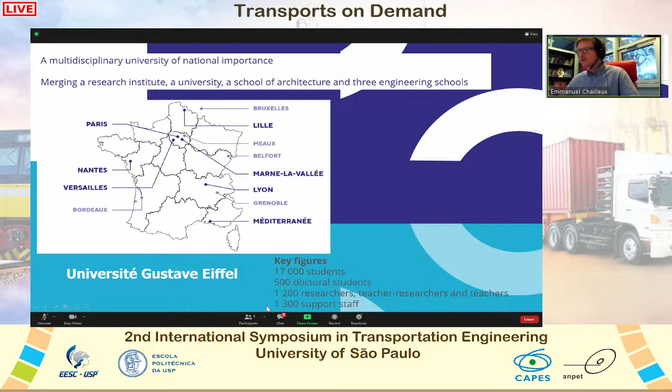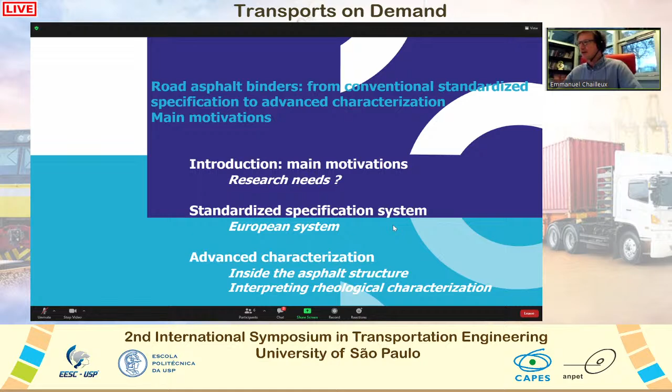The plan of my presentation is as follows. There are two items: the standardized specification system, the European system, and also some advanced characterization using linear viscoelastic theory and experimental characterization. But first, I would like to make an introduction explaining the motivation for this presentation, and what the research needs are according to specification.

So why do we use asphalt in road construction technique? In fact, it's a very interesting material. This material is between a liquid and a solid. It can be represented by a spring associated with dashpots — what we call a viscoelastic material. It can be liquid at high temperature and very brittle at low temperature, and in between these two extremes. This is why this material is very good for roads compared, for example, to cement concrete, because it has the ability to relax stress — stress coming from thermal expansion of the material, but also stress coming from traffic, from the lorry.

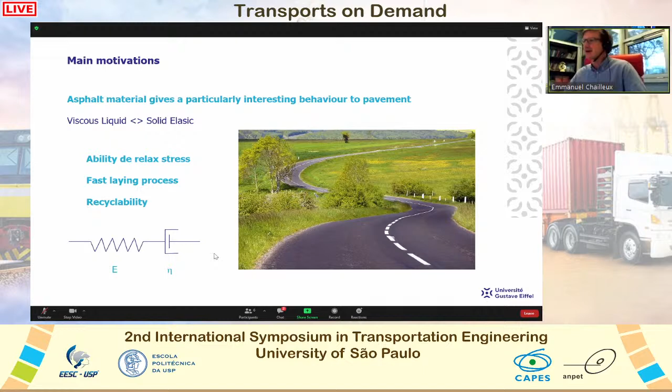There is also another advantage: the fast laying process. Traffic can circulate very fast after the laying process, perhaps within 1 hour, which is not the case for other types of material. The other advantage is recyclability. In fact, this material can be considered a thermoplastic, meaning you just have to heat it to reduce the viscosity and recycle the material.

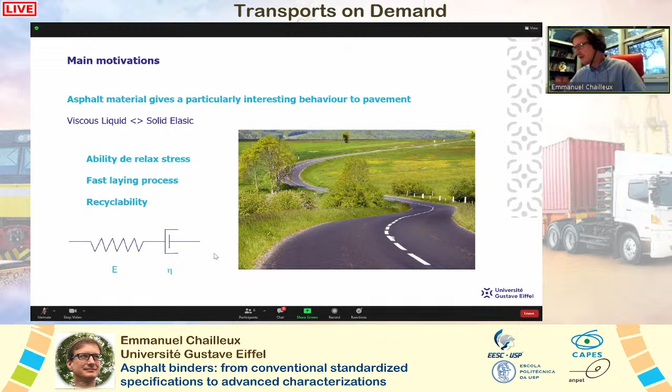So some definition of asphalt. Asphalt could be natural, as you can see on the picture, where we can find bitumen direct from a lake here in Trinidad, or from a mine. But more generally, road asphalt came from petroleum oil distillation, the residue from petroleum oil distillation.

The main characteristics of this special material are as follows. It is highly viscous or solid at room temperature and liquid at very high temperature. It's an almost non-volatile material, even if there are some debates at the moment about this fact. It's a sticky material, and what is very important, it's a hydrophobic material. It is perhaps the main property, the main interesting property, the hydrophobicity of this material.

And another definition is that asphalt has to be soluble in toluene. So next slide.

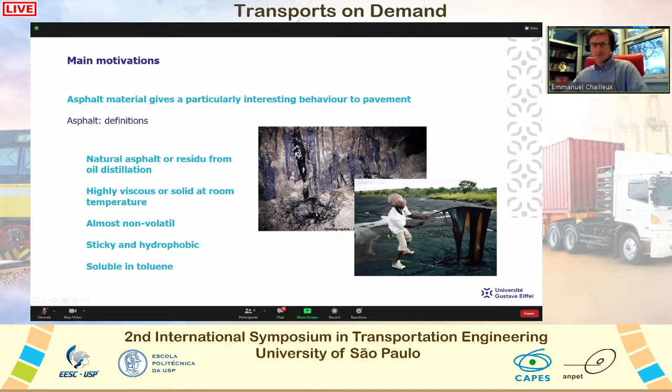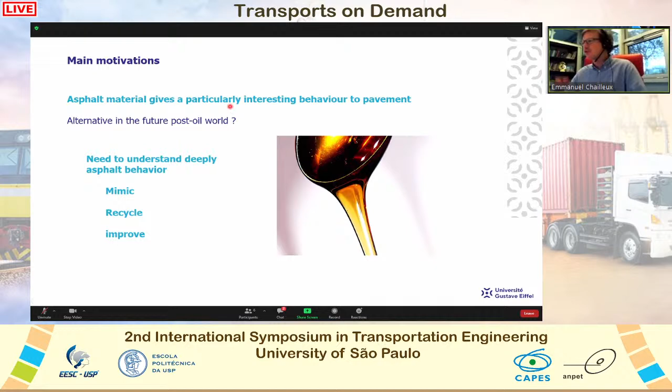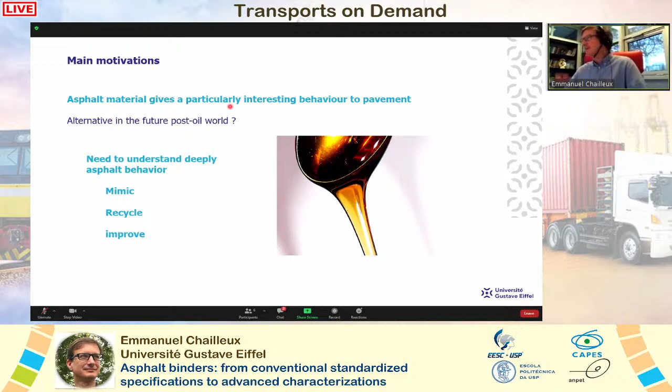But let's speak about the future, not perhaps the near future, but the far future. What could be the alternative in the post-oil world? We have to think about it, I think. We have to think about the future. It's why we need to understand deeply asphalt behavior, in order to be ready in the post-oil world to mimic this material with other types of natural resources, but also to recycle this material more and more, and to improve this material to make the pavement more sustainable.

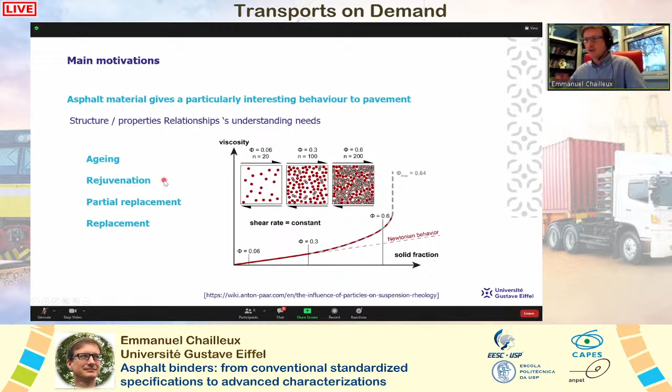In order to better regenerate this material, if you want to recycle more and more. And we need to understand this material perhaps to mimic the material in the case of partial replacement, but also in the case of total replacement.

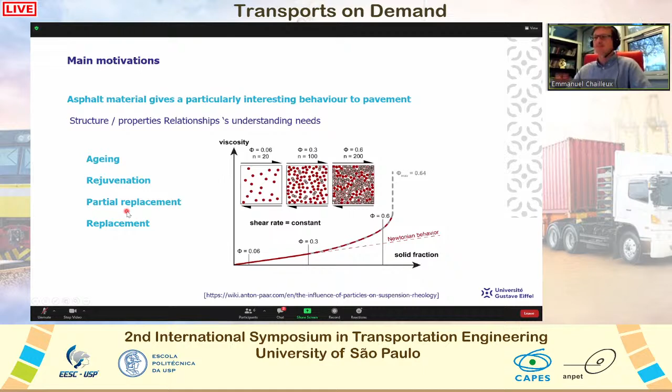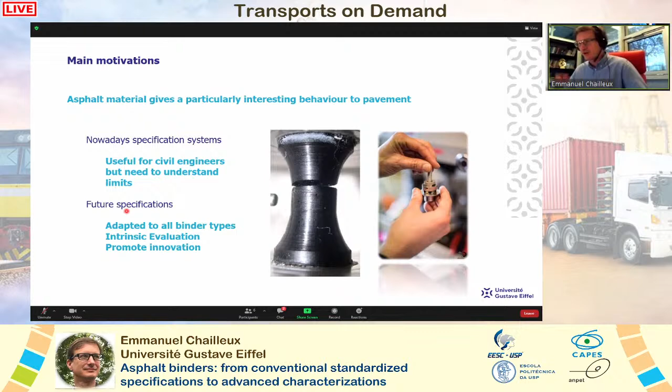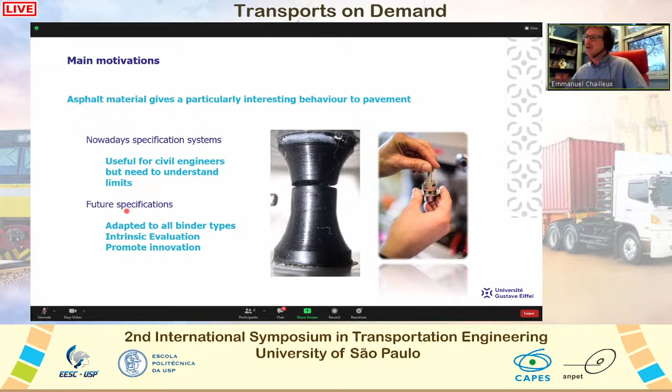from petroleum oil. For this, we need to have intrinsic evaluation, measuring intrinsic parameters, not empirical parameters. It will help us to promote innovation in the field of pavement construction.

So I will now go to the standards used in Europe for road asphalt, beginning by explaining the general properties and performance we need to have for an asphalt binder. So it's general in every country. We need to have this for asphalt binder.

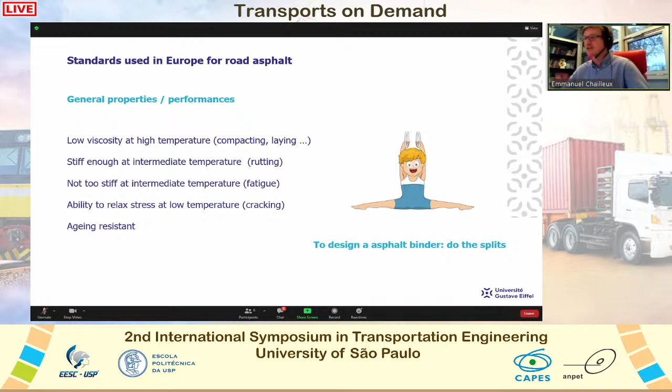We need to have a low viscosity at high temperature of this material in order to help the compacting and laying process. We need to have a material stiff enough at intermediate temperature, around 60 degrees, in order to avoid the rutting phenomenon, but not too stiff at intermediate temperature in order to avoid premature fatigue of our material.

At low temperature, we need to have the ability to relax stress in order to avoid cracking. And of course, all these parameters have to resist aging. So you understand that designing an asphalt binder is like doing the splits.

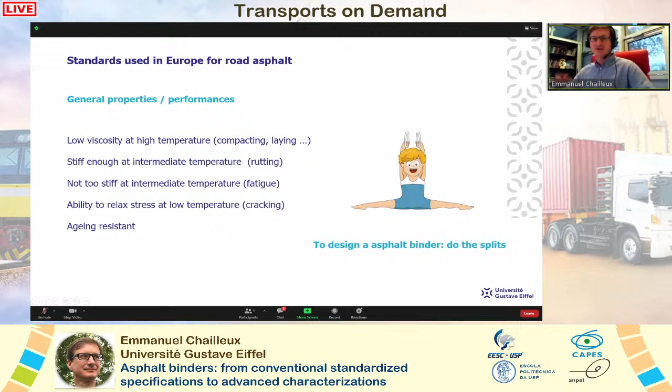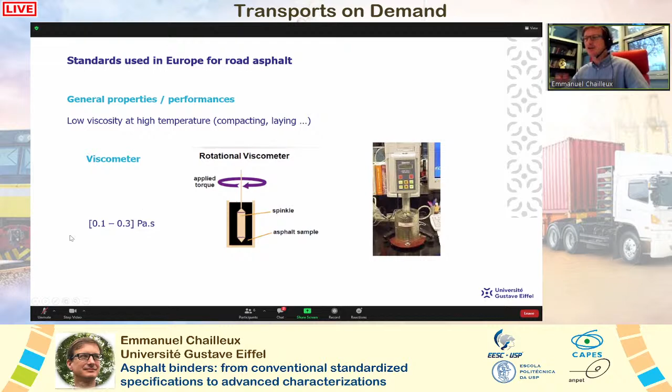Concerning the viscosity, it is generally measured using a rotational viscosimeter at high temperature, between 100 to 160 degrees. It's a very conventional measurement. And what we have to know is, in order to facilitate the process of mixing asphalt with aggregate, we need to have a viscosity between 0.1 and 0.3 Pascal-second. It's very important if we want to coat the aggregate with the asphalt binder.

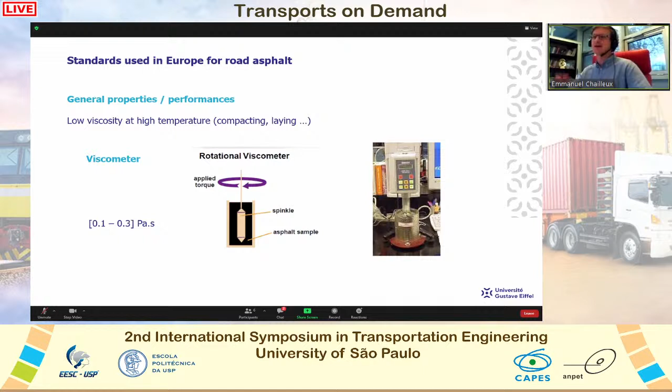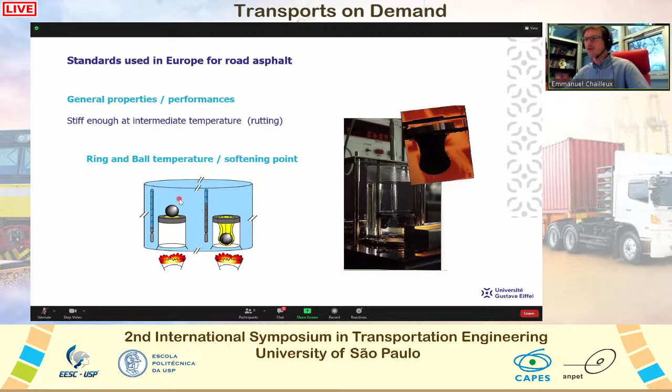Concerning the intermediate temperature, in Europe, we still use the ring and ball temperature, also called the softening point, which is strongly linked with the temperature where the risk of rutting happens. So I don't know if you know this type of test, but we have a ball placed on a small slice of bitumen. We heat up this system, and when the ball crosses the film of bitumen, we have the temperature, the ring and ball temperature, linked to the risk of rutting.

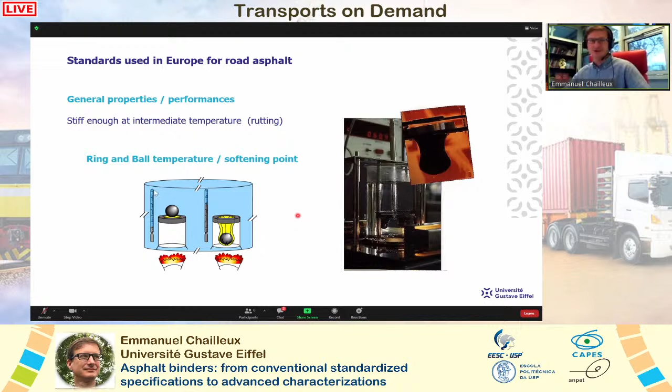At intermediate temperature, we measure the penetrability at 25 degrees. This well-known penetrability test is used to define the grade of bitumen. The principle of this test is to let a needle go into a binder at 25 degrees during 5 seconds, and we measure the deepness of the needle.

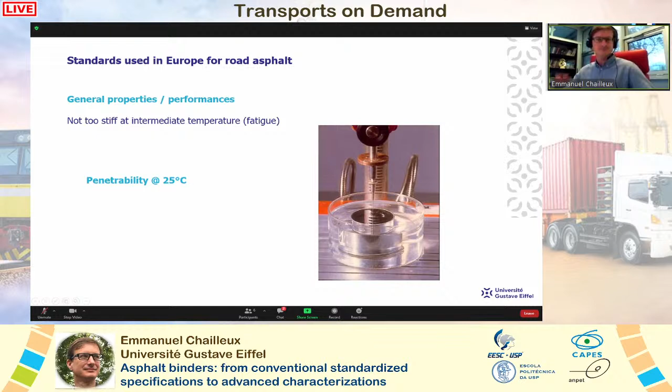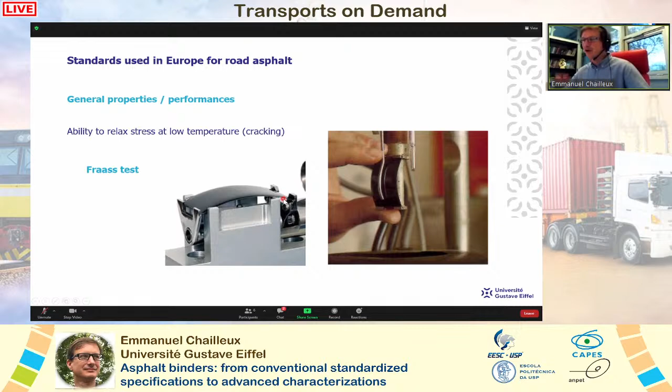At low temperature, in Europe we still use the Fraass test. The Fraass test consists of a film of bitumen placed on a steel plate, and we deform this system at different temperatures, and we take the temperature at which this film of bitumen breaks.

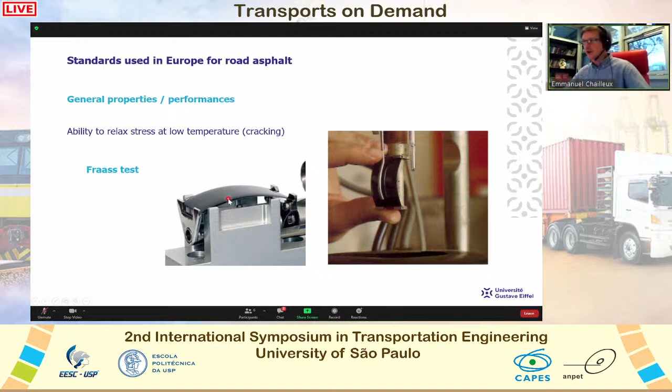For the aging, in Europe we just use for specification the RTFOT, the rolling thin film oven test, where air is blown across a film of bitumen in a bottle during a certain time at 163 degrees in order to reproduce what happens during the mixing process in plant.

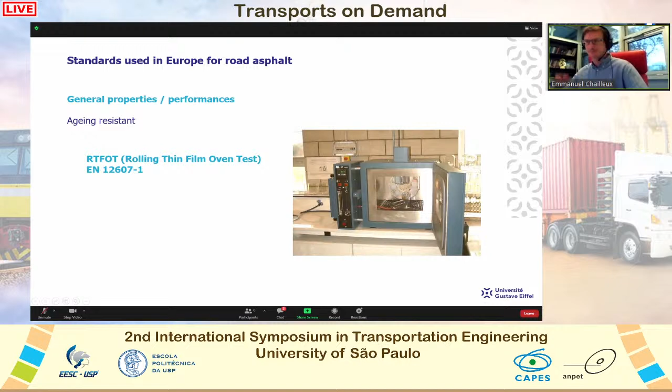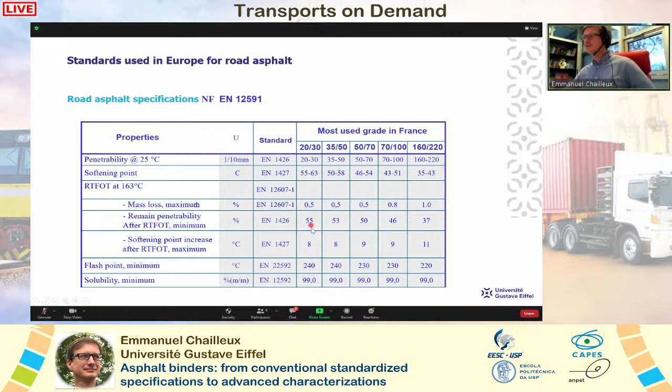You see that the penetrability is associated with a range of softening point. What's very important is what happens after aging by RTFOT. The mass loss during this aging process has to be below 0.5%. The remaining penetrability in percent has to be above 55%. The penetration and the softening point must not evolve too much. The softening point has to remain below 8 degrees for this one, 9 for this one, and 11 for this one. So you see that the specification for road asphalt is very simple in France.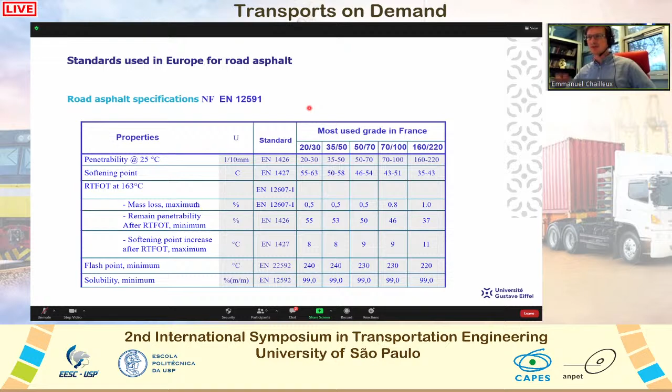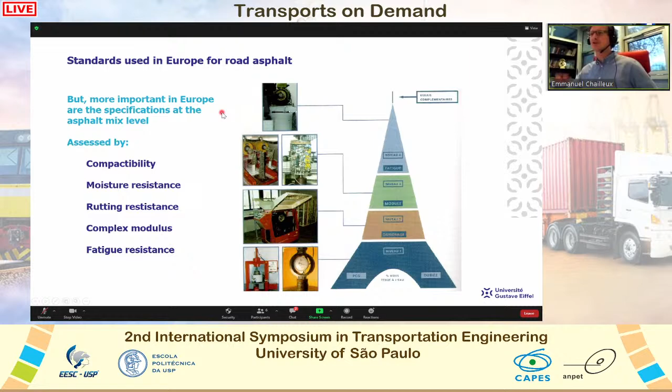It is measured using empirical tests like penetrability and softening point. But what's important in Europe, and especially in France, is a specification at the asphalt mix level. I will not go into detail on this specification—I can come back another time for that. But remember that for the asphalt mix, specifications are firstly based on compactability, which is the first step, using a gyratory compactor. Our material has to be compacted easily.

Then moisture resistance, using in France Duriez's test. And after, rutting resistance, using the French wheel tracking test. And then if needed for structural courses, for example, complex modulus, measured at 15 degrees, 10 Hertz, and also fatigue resistance. But I will not go into detail on this specification at the mix level.

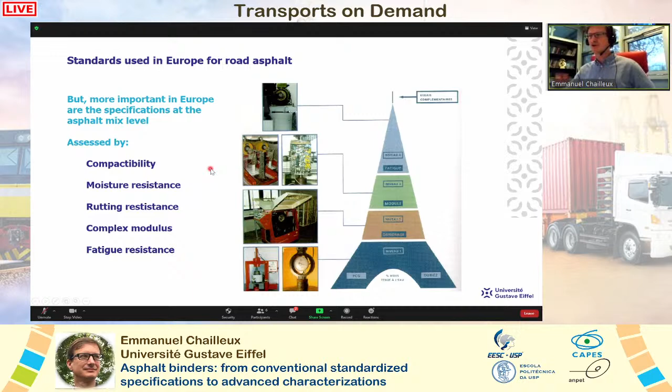I prefer to move on to another topic now, which deals with what we can do if we want to make a more advanced characterization of asphalt binder, in order to define perhaps future specifications based on intrinsic properties and not on empirical ones. So let me come back on asphalt structure.

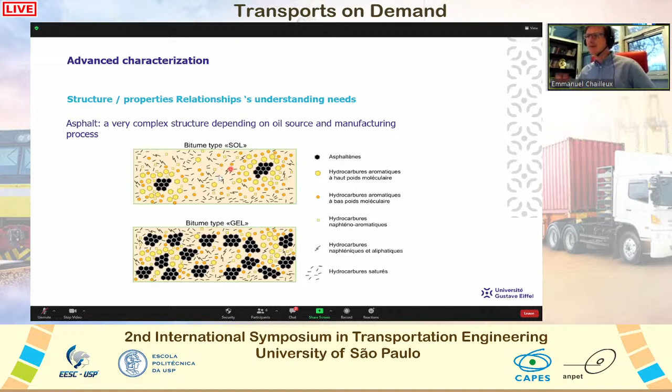We know that asphalt is a very complex structure, which depends on the oil source and also on the manufacturing process. It is more or less a suspension of hard, rigid molecules—asphaltenes—in an oily matrix composed of resin, aromatics, and saturates. All these molecules can interact with themselves to form a special structure, which could be between a sol type, solubilized type, and a gel type, where we have enough asphaltene agglomerate to create a sort of network linked by physical forces.

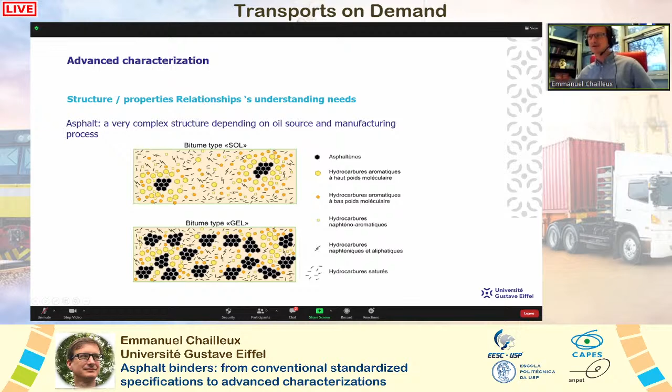So you see, this material could be considered as heterogeneous, with a complex structure, but it can also be considered to have a continuous molecular mass distribution. There is a certain continuity in the molecular mass distribution. Here you can see on this graph some size exclusion chromatography results.

So here we have the normalized size exclusion chromatography signal according to the molecular mass equivalent polystyrene for the saturate, the aromatic, the resin, and the asphaltenes. And here the dotted line represents the whole asphalt.

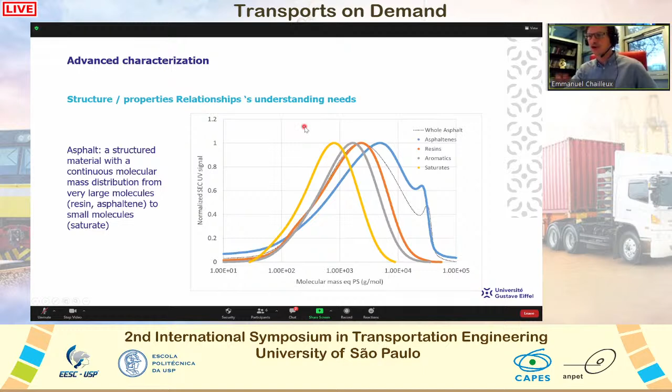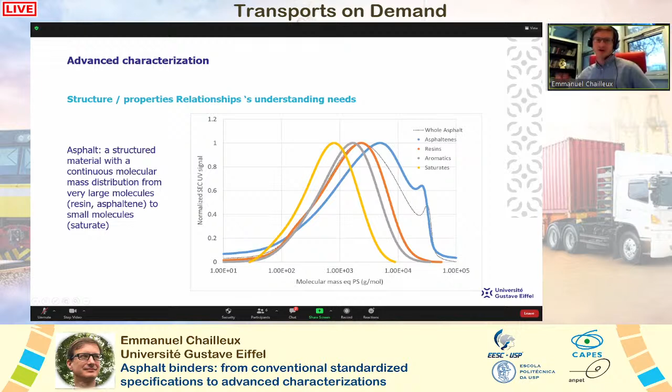You can see that all these distributions overlap. So it seems that we have a continuity in the molecular distribution from very large molecules here to very small molecules here where the saturates are. It's very important to understand that we have a very complex structure, but also a continuous molecular mass distribution of the asphalt. So the question now is: is there a link between mechanical properties and asphalt structure, or more precisely, is there any relationship between linear viscoelastic properties and asphalt structure?

I don't know if you use linear viscoelastic measurement a lot, but you have to know that we can measure different types of properties, different types of modulus with linear viscoelastic properties. We can measure the relaxation modulus, the creep modulus, but also the complex modulus.

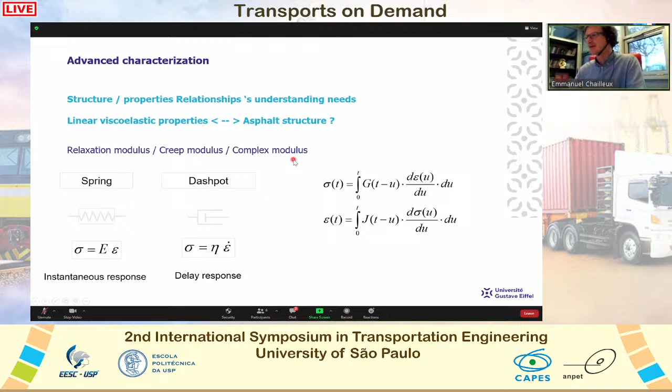The linear viscoelastic theory says that we can define the relaxation modulus like that in a hereditary integral, where you have the stress and the rate of strain, or at the opposite, the creep modulus, where you have the strain and the rate of stress, which you can calculate using a hereditary integral.

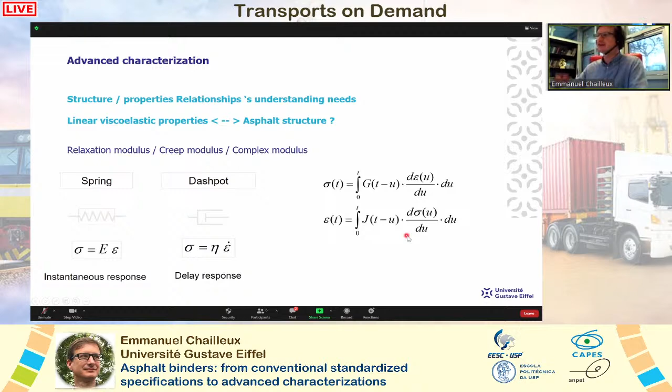But I prefer to speak about what we call the complex modulus, which is one of the properties we can measure using the linear viscoelastic theory framework. So what is the complex modulus? In fact, it is a transfer function between two sinusoids.

I will explain. When you load a body with a sinusoidal force, and if you are in the small strain domain, the response in terms of deformation will also be a sinusoidal signal. We define the complex modulus as a transfer function between these two signals. It means that this complex number will have two parameters to define it.

The norm of the complex modulus, which is the ratio between these two amplitudes, and also the phase lag between the two signals, which is the phase angle of the material, representing the phase lag between these two signals. If the signals are synchronized, the phase lag is 0, and the material is elastic. As soon as you have a phase lag, the material is viscoelastic.

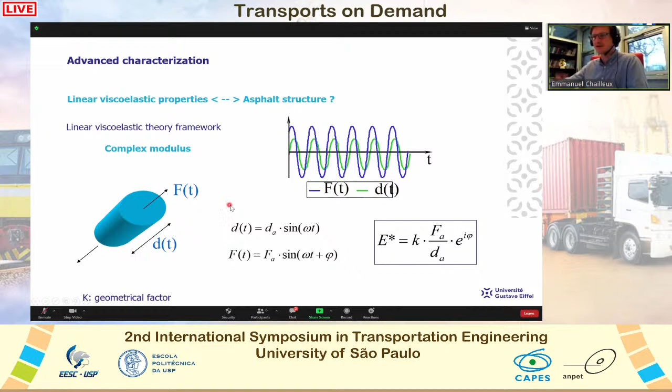So here I have presented a mechanical tension-compression loading mode, but you can use different modes of loading. You can also use shear loading, which is commonly used for binder using what we call a dynamic shear rheometer. In this case, we measure the complex shear modulus using exactly the same system with sinusoidal force and sinusoidal response.

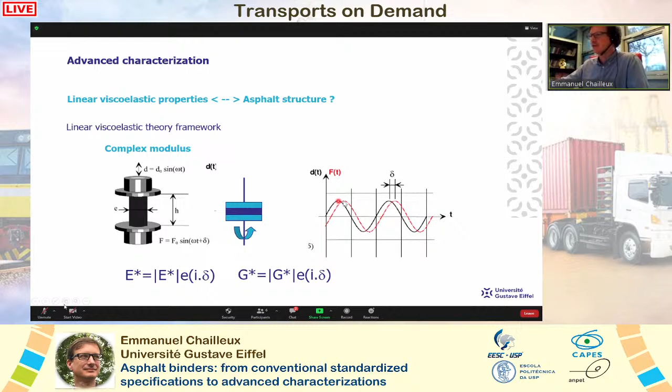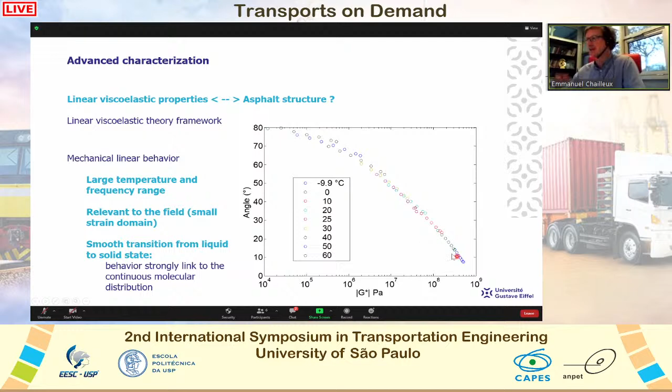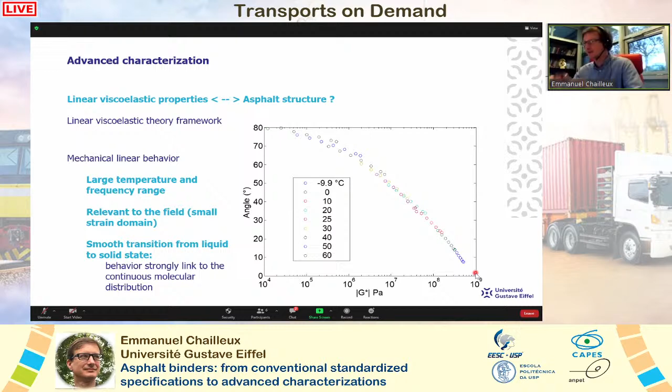So we think that this mechanical behavior is linked to the continuous molecular distribution. There is a strong link between what we see in viscoelastic properties when we measure these properties from very low temperature to very high temperature at different frequencies. There is a strong link between this behavior and the molecular structure.

So the question is now, is it possible to have access to the molecular mass distribution from viscoelastic measurement?

So we have conducted several research this years, trying to develop what we call the delta method concept. I will explain this method, and we will see how we can get the molecular mass distribution of asphalt from viscoelastic measurement. This method was first developed for fusible polymer, and it was firstly introduced by Zanzotto, an asphalt specialist, some time ago.

This method uses complex modulus data, of course measured in the linear domain, and the main concept is based on the comparison of observation time versus molecular relaxation time.

Here you can see a sketch of molecules which are loaded and unloaded, and the relaxation time represents the time for the molecule to come back to equilibrium. So the main concept is based on this.

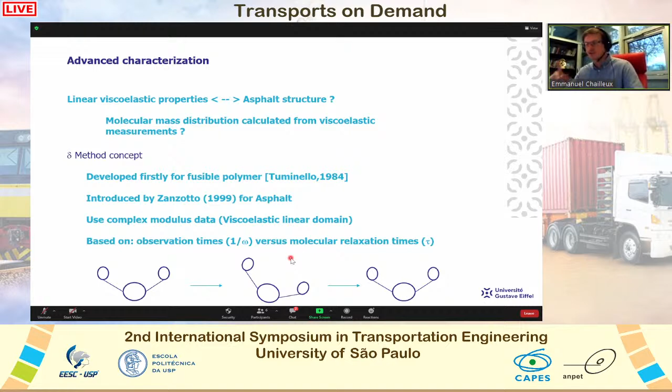If observation time is short, or high frequency, in comparison to the relaxation time—the time to come back to molecular equilibrium—then the molecule appears to contribute to elasticity. At the opposite, if observation time is very long in comparison to the relaxation time of the molecule, then the molecule appears to not contribute anymore to elasticity, but to viscous behavior.

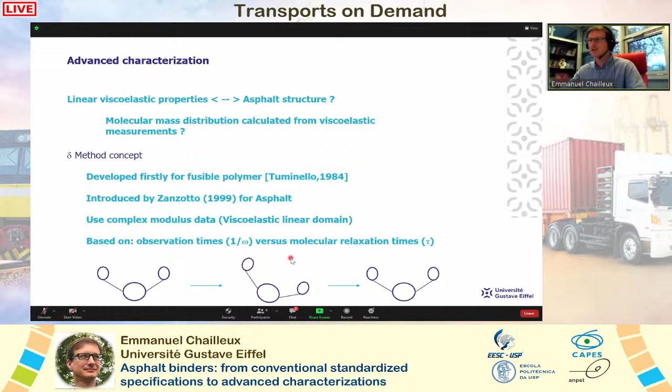So let's go more in detail, showing you a plot of phase angle here according to frequency. It is the master curve. I can go later during the question on the master curve construction. So you see that we have a phase angle from 0 to 90, from the elastic state to the liquid viscous state.

And you see that we have a continuous curve linked to the continuous size molecular distribution influence. We think that we could represent all this behavior of this phase angle with a typical type of molecule.

In the liquid state, the phase angle is strongly influenced by the biggest molecular structures, so the molecular structures which have very long relaxation time. It means when the phase angle is 90 degrees, the observation time is very long compared to the longest molecular relaxation time.

At the opposite, when the phase angle is 0, the material's viscoelastic properties are strongly influenced by the smallest molecular structure with short relaxation time. It means that the phase angle equals 0 when the observation time is very short, because we are at very high frequency, very short compared to the shortest molecular relaxation time.

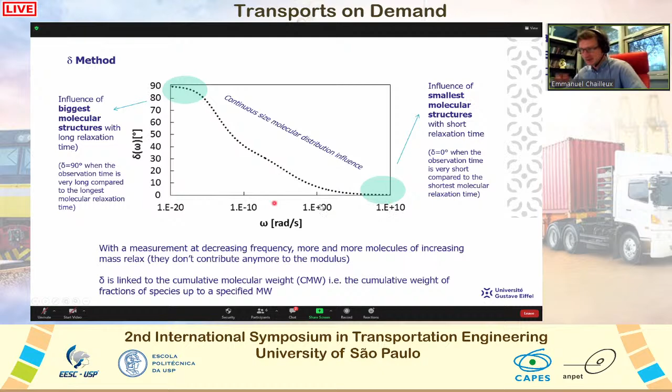So you see, it's a comparison of observation time and molecular weight. With a measurement at decreasing frequency in this direction, more and more molecules of increasing mass relax. So when I say increasing mass relax, I mean they don't contribute anymore to the modulus, to the elasticity, and become more and more viscous.

So it means that we can consider that the phase angle is linked to the cumulative molecular weight, or in another word, the cumulative weight fraction of species up to a specified molecular weight. So it's the basic of the method, the link between the frequency and molecular mass.

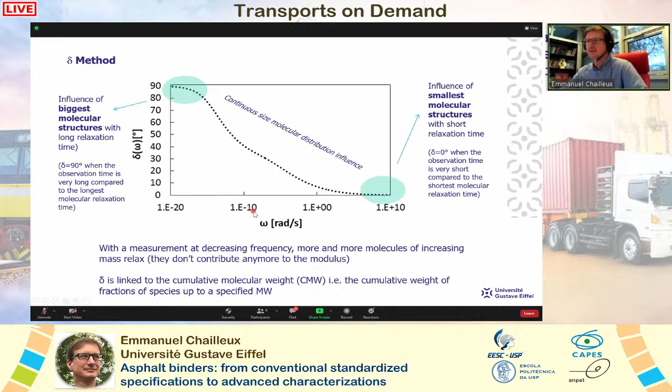Of course it's a big assumption, but we need to assume that the cumulative molecular weight distribution, what we call the CMWD curve, is proportional to the delta master curve. So it is this equation: the cumulative molecular weight is proportional to the phase angle master curve.

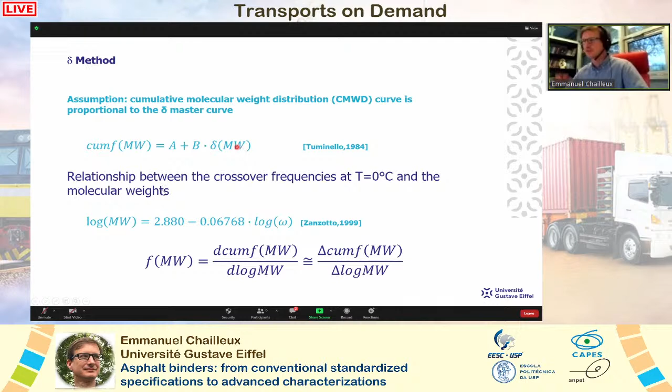But we need, in order to have access to the molecular weight distribution, to transform the frequency of measurement into the molecular weight, and this relationship has been done by Zanzotto 20 years ago. He has built this type of relationship where we can calculate the molecular weight according to the frequency used.

At the end, the distribution of molecular weight can be calculated by differentiating the cumulative molecular weight. So it means that to have this distribution of molecular weight, we need just to differentiate the phase angle according to the frequency or to the molecular weight. So it's a very simple way, at the end.

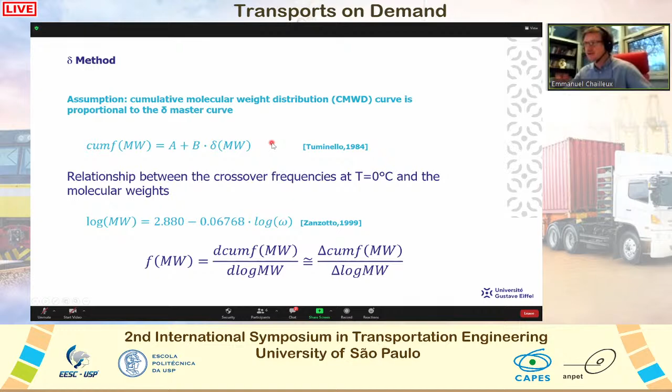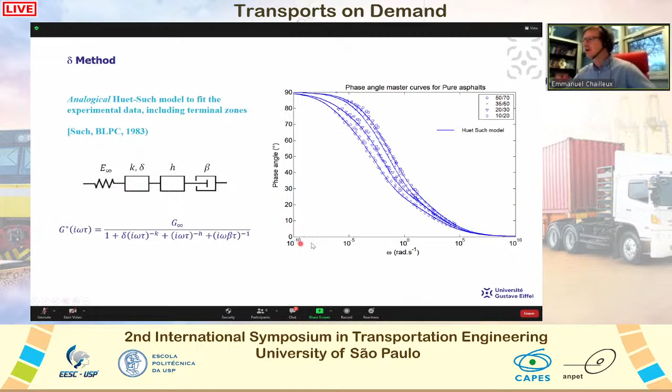But for that, in order to have access to what happens at very, very low frequency and at very high frequency, we need to extrapolate our experimental data. It's why we use a model developed in my lab a very long time ago.

The Huet-Such model, which is a rheological model composed of a linear dashpot, a spring, but also what we call a non-linear dashpot. And this dashpot behaves between a spring and a linear dashpot.

And here you have the analytical expression of the complex modulus using this model, and you can see that this model can model very well the experimental data for 4 types of bitumen, from 50/70 to 10/20, and we can have access to a terminal zone, which is very important to determine the molecular distribution, as you will see.

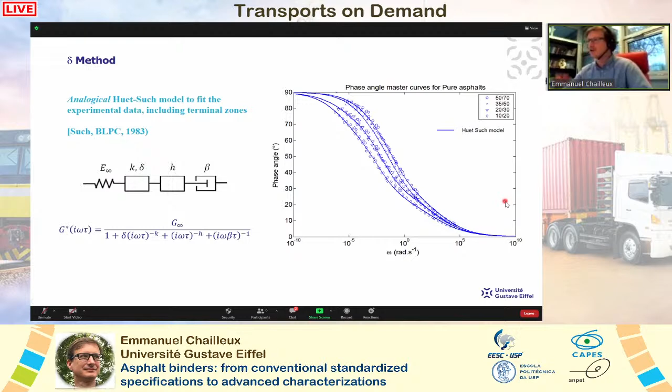So to calculate the distribution, you need complex modulus measurement, master curve construction of the phase angle, Huet-Such model calibration, the calculation of the frequency of the molecular weight from the measured frequency, and then you just have to differentiate the phase angle modeled by the Huet-Such model.

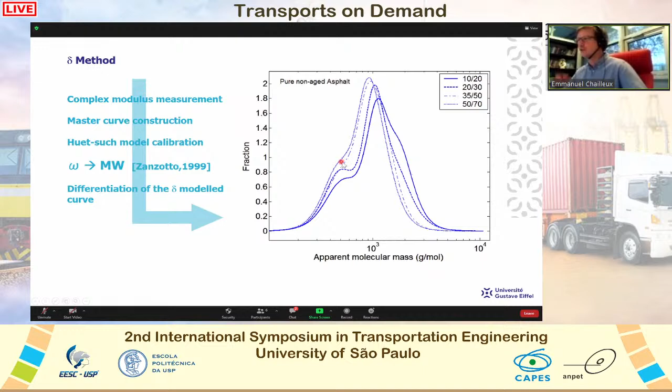And here you have the result of this. So this curve came from the phase angle differentiation for pure non-aged asphalt. So you see that we have a distribution centered around 1,000 grams per mole, and you see that the peak of distribution order follows the grade of bitumen. Here we have a very hard bitumen, so we have more big molecules than the softer one, where you have more light molecules.

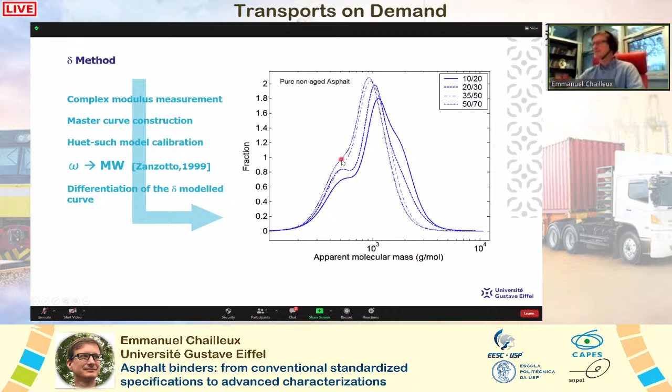So I will show you now some examples where we use this method to first see the effect of modification of asphalt with very hard bitumen called asphaltite. So here we have the distribution of asphaltite, which is a very heavy component.

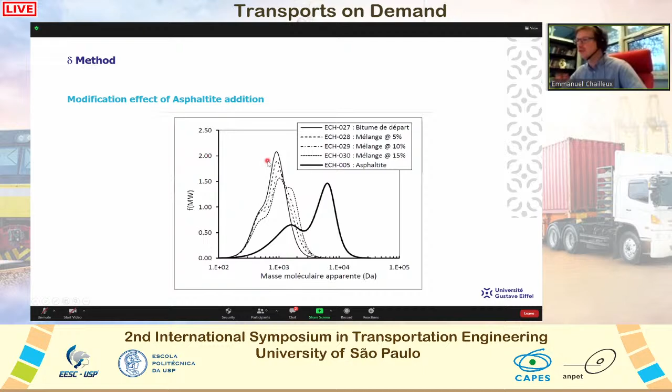And when we mix this asphaltite, which is a natural bitumen, very hard bitumen, with soft bitumen here, at 5, 10, or 15%, we see the evolution of the heavy molecule increasing when we add more and more asphaltite. So we have a vision of what's happened in terms of molecular distribution when we add hard material to this soft material, which could be very helpful to understand what's happened in terms of dissolution of this material in the other one.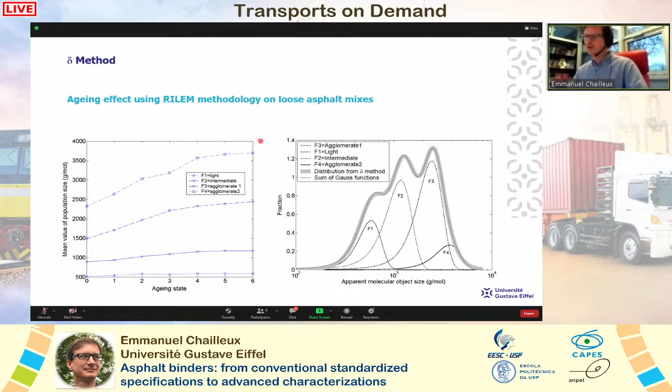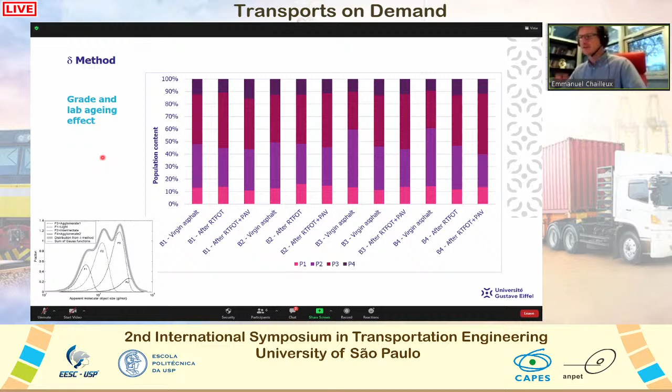If we look at the population content with aging and with the grade of bitumen, we recognize a typical result also we have with the SARA analysis, for example. This result shows that what is important is the 2 intermediate populations. So during aging, but also during the changing of grade, there is an exchange between these 2 intermediate populations, while the lowest and the highest one remain relatively stable. So a very interesting result, which confirms what we see with other techniques. So we are very confident with the delta method technique, and we think we can have very good information about the molecular structure variation with aging, and also with lots of other parameters.

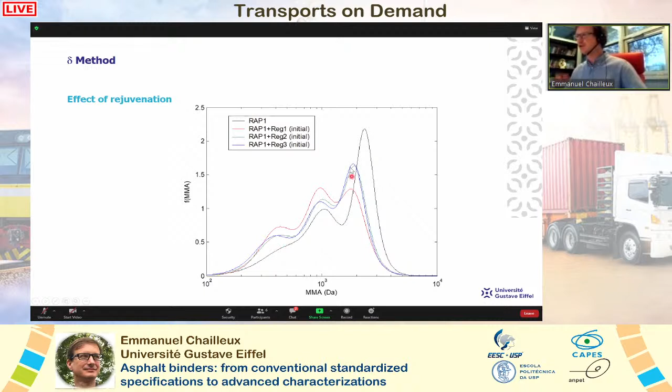So finally, I want to finish with the effect of rejuvenation with the delta method. In black, you have the distribution of asphalt binder extract from a very old road. It is a typical distribution calculated from the delta method of a very old bitumen, with the population of high mass which dominates the overall distribution. When we add regenerator—in this case 3 regenerator was used—we see that this big molecular structure is destroyed in favor of another intermediate molecular structure, and another population appears in the lower mass domain, which is linked to the regenerator itself, a very low viscosity material.

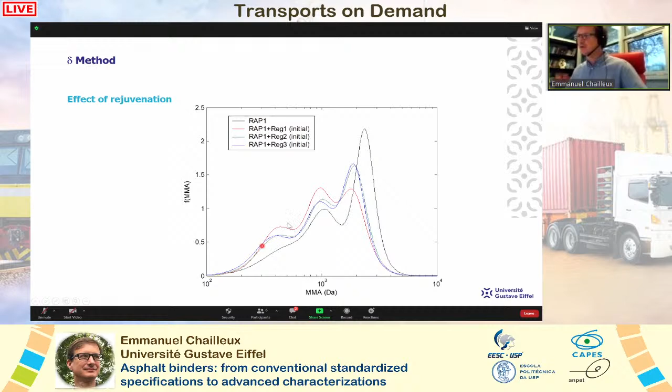So I think now it's time to conclude. First, I want to recall that the University Gustave Eiffel is a new university. I work in a laboratory called Material for Transportation Infrastructure. We were IFSTTAR one year ago, and some years ago Laboratoire Central des Ponts et Chaussées, but now we are a university.

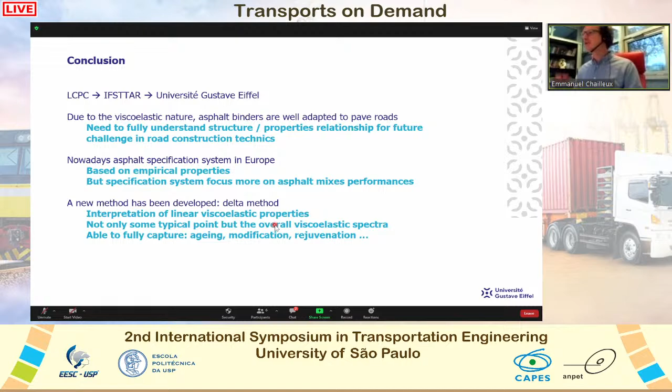During the introduction, I tried to explain that due to the viscoelastic nature, asphalt binders are very well adapted to paved roads. Even so, we need to fully understand the structure-properties relationship of this material in order to be ready for future challenges in road construction techniques, especially when trying to find non-conventional materials, when trying to recycle roads, and when trying to understand the aging of our pavement.

The specification for asphalt in Europe, as you have seen, is still based on empirical properties. But you have to know that the specification system in Europe is more focused on asphalt mix performances.

I showed you a new method, the delta method. It's a new way to interpret linear viscoelastic properties. In this method, we not only take some typical points on the curve at certain temperature or frequency, but we observe the overall viscoelastic spectra in order to be close to the internal molecular structure of asphalt. You have seen that we are able with this method to fully capture aging, modification, and rejuvenation, and we hope we can go further with this method, and perhaps move toward a specification.

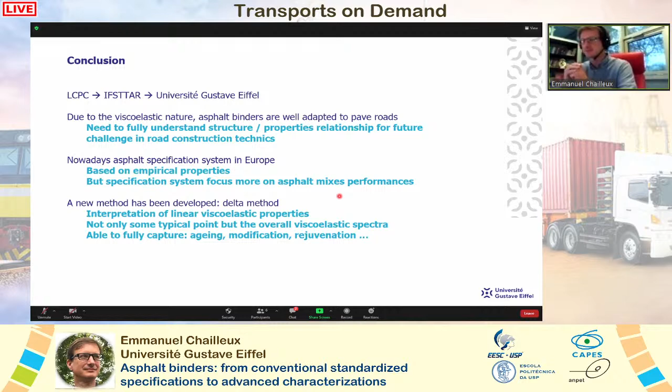Thank you very much for your attention. So now I'm ready to answer some questions if there are any.

Thank you very much, Professor Emmanuel, for your great presentation, especially this topic relating the molecular structure of asphalt binder and rheological properties. Very interesting. We have some questions—can we proceed? Yes, of course. First question is asked by Andrisi, who is my student here. She asks about binder specification in Europe: what is, in your opinion, the future of binder specification in Europe? Is it moving towards a performance-based specification, such as the American one, or will it keep based on penetration and ring and ball and so forth?

I think specification in Europe, specification at the binder level, is mainly used to sell and to buy bitumen. But what is more important for road owners, for example, is the specification at the mix level. So I think in Europe our effort has to improve the mix performances, especially including aging, but at the mix level. Concerning asphalt binder, we need to understand more what happens at the material level itself. I'm not sure we have to improve specification at the binder level, or move from empirical tests to, for example, the PG grade. I think we have more to work at the mix level, in fact, for specification, for research, for the understanding of the material. Of course, we need to find more intrinsic evaluation and do more than empirical tests. I don't know if I'm clear or not.